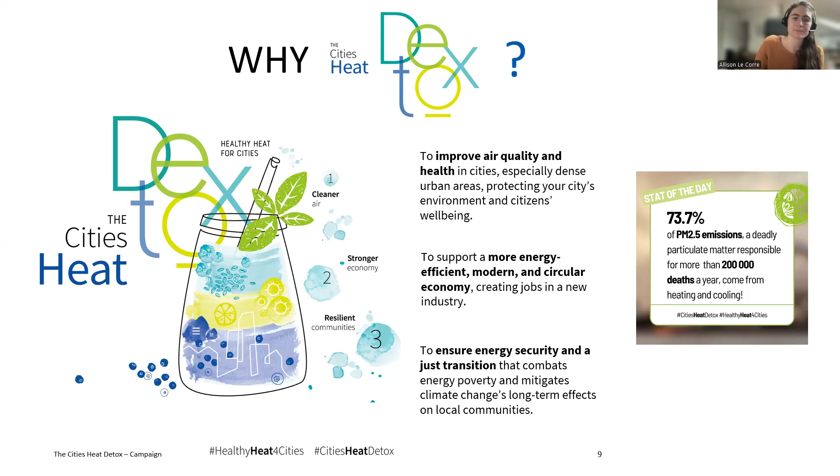What concretely can cities do to detox their heat? The campaign is also promoting the different steps in a city's heat detox, as one would if they're doing a personal detox. First and foremost, it's important to know what you are putting in your body and what are these toxic sources. The same way cities, it's important for them to know and map out their heating systems, what the sources are.

And the possible alternatives, and where they can have a bigger impact and an impactful detox journey. So here we are promoting all the efforts that cities are doing in planning for their heat decarbonization journey, in line with the obligation of the EED to have heating and cooling plans for cities over 45,000 inhabitants. So here we're sharing different stories of cities that have already done this work, with very elaborate heat maps where they show where they will be expanding district heating, where citizens can connect to district heating.

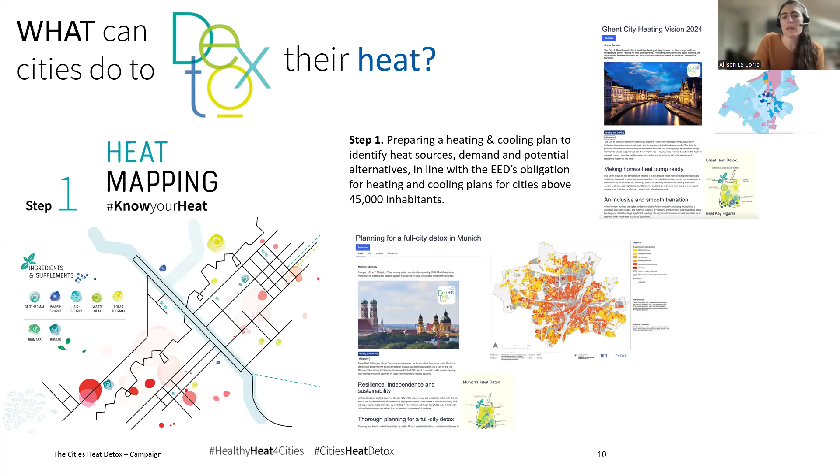Or what other possibilities they have for healthier heat, and where they also plan out their journey. The second step to the detox is then trying to go for a full city detox. So as one would try to maybe go for a full body detox, a full body cleanse, here the idea is that cities, by expanding, developing, or renovating district heating networks, can have the most impact in undergoing and really getting rid of these toxic sources.

So here we're also shedding light on different examples of cities that are either starting off with the district approach, such as Leuven, or expanding the district heating networks they have, and those also that are refurbishing and renovating and making them more modern. And thirdly, and not least importantly, once you have these networks and are going for your full city approach, when you know the alternatives, it's really finding these clean sources of heat to feed your district heating systems. So that's the cleansing part of the detox.

And here, the campaign is also trying to showcase this idea of detox, the different mixes that cities have that are very particular and unique to each city's capabilities and their territories and what they have at hand.

So here you'll see a few examples of cities' detox. What is the base they use? District heating, district cooling, heat pumps, and what are the clean sources they use to feed that heating? Geothermal, waste heat, solar thermal, or large-scale heat pumps.

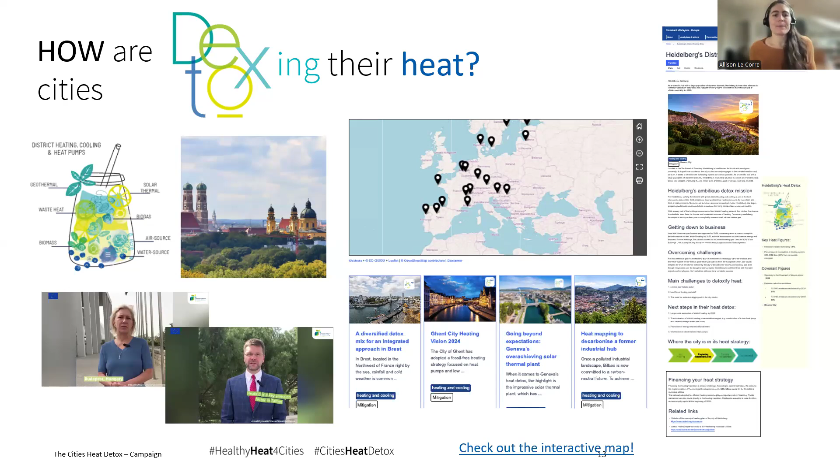So our campaign, as I said, is about sharing stories, and for that, I just call on you to share your story if you have one that you would like to see on the map.

And if you don't want to apply to the award, or if it's too late, you can also submit your story via template. That's all available in this comms package for cities that we have on our website.

And another way of participating in the campaign is also echoing the messages that I presented. And here we have a comms package on our website for partners or for anyone who wants to raise awareness around the benefits of decarbonizing heat, the importance of district heating in this effort.

And you can also subscribe to the campaign to receive regular updates, because as Oksana said, we are sharing all the opportunities that we have identified through all our campaign partners for capacity building and for empowering cities in this journey, including the crash course that will take place in June and other webinars leading up to it.

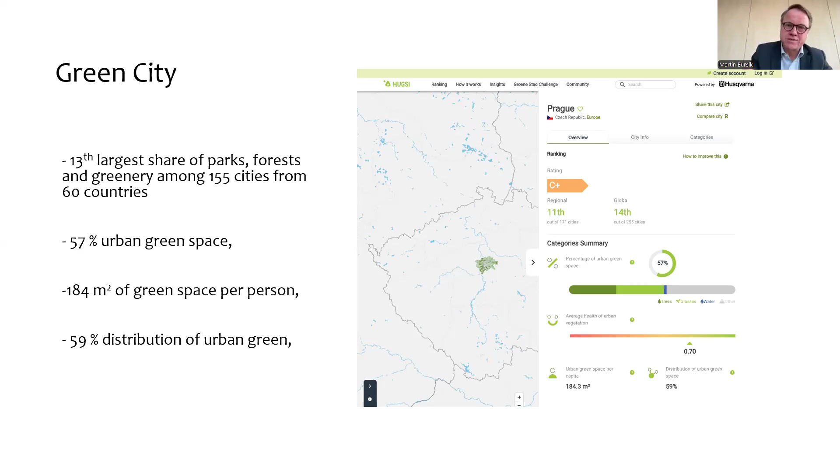We were surprised when we realized that Prague belongs to, according to the Husqvarna index, which is quite funny, the producer of these grass cutters and that technologies, they set up the index, which is a more smart way of identifying the level of how the city is green, so that the green areas are affordable, are not just in the surroundings, but are also in the center of the city. So this is where we are. This is what you can be looking for in June next year.

We developed the Prague Climate Plan, which, as it was said, has got a target of reducing the greenhouse gas emission, the CO2 equivalent emissions, by 45% till 2030. We followed the IPCC special report, which was published after the Paris agreement, the successful Paris agreement.

What is interesting, when the Prague Climate Plan was adopted in the city assembly, there were environmental NGOs there, and a Fridays for Future representative was quite negative towards the 45% reduction, saying that the European Union has got Fit for 55 already, so the plan is not updated. However, that was a kind of misunderstanding, because our reduction of 45% is compared to 2010, and the 55% reduction of Fit for 55 is compared to 1990.

As you see, the Central and Eastern European countries, which got rid of the communist regime and transformed into a liberal economic model in the early 90s, in our case in November 1989, had a serious reduction of emissions in that first period. So in fact, this is showing that 45% compared to 2010 is more than 55% compared to 1990. You see the 74 million tons to meet by 2030, compared to 90 million tons. So to stress it, Prague is more ambitious than the Fit for 55 target, in fact.

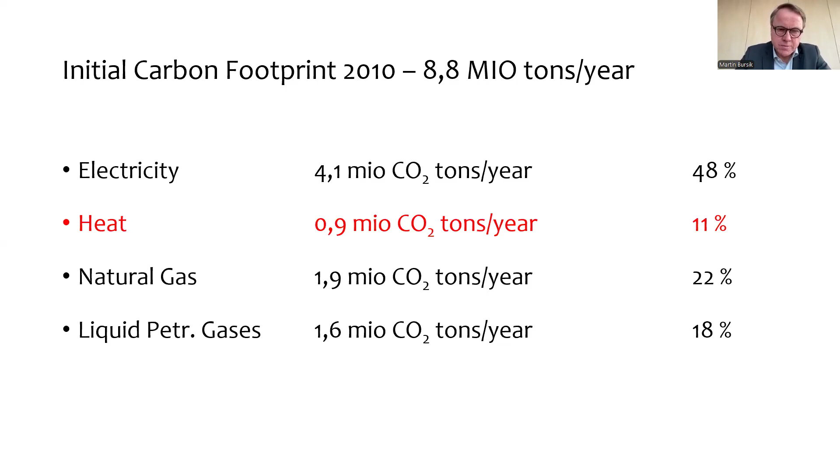And of course, cities like Prague and other cities are always dependent on the input of energy from the outside. So this is our starting point. What to do?

The carbon heat, coal heat, is delivered to Prague from a power plant, heat plant, which is 34 kilometers out of Prague. It was built in 1960, then modernized. It's been delivering heat to Prague since 1995, and the carbon intensity of the heat is the highest possible, running on lignite. It is in the ownership of Czech Energy Works.

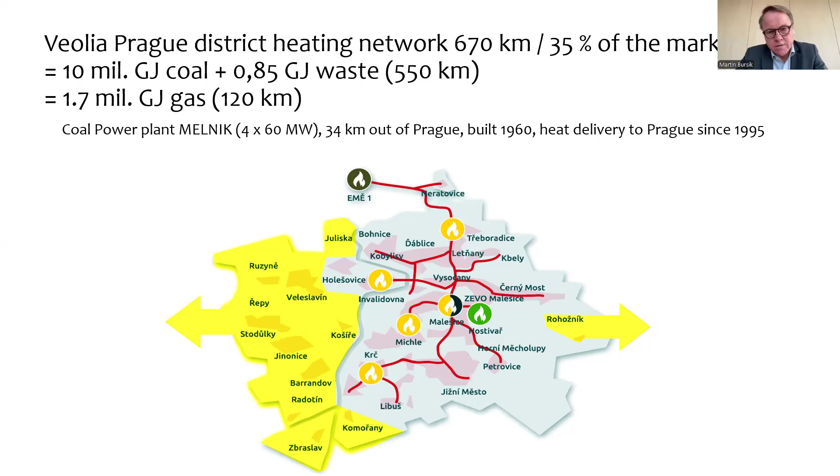The problem of the city is a very sensitive issue: on one side of a pipe you have a heating plant owned by the dominant Czech Energy Works, a partly state-owned company, and on the other end is Veolia, which also has no connection with the city. So though the utility is called Prague Heat Utility, Prague doesn't have any influence on it. There is a contract between these two companies which is even unknown to us. The only thing we know is that it's going to last until 2034, and that there is a plan to switch the Mělník power plant from coal to gas. So this is where we are.

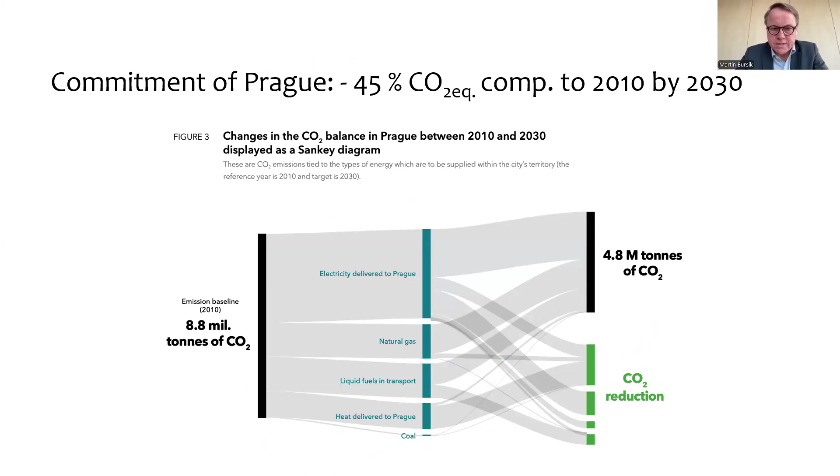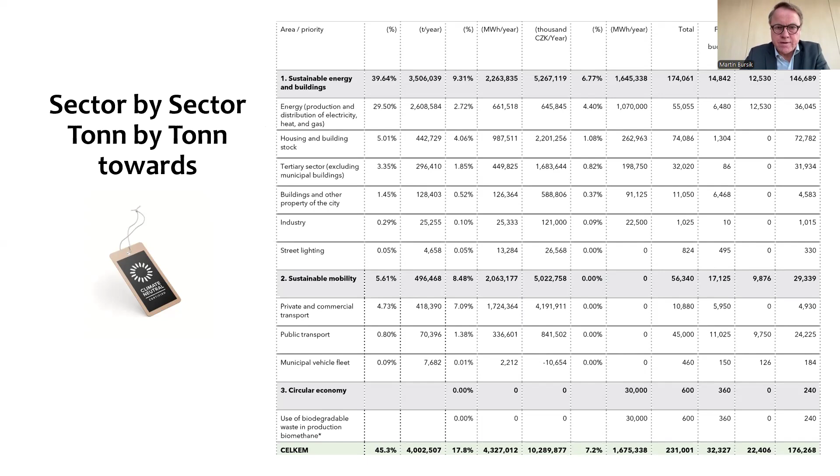So we were thinking hard about how to achieve this 45% reduction. You see the Sankey diagram, which shows what we can do in electricity, natural gas, liquid fuels and heat. This is where we got, and here you see the potential. The highest potential, of course, is in energy and in the housing and building stock. We made a number of Excel sheet calculations to test whether we could really reach this 45%, and we got it. As you can see, almost 40% of the potential is in sustainable energy and buildings, with a dominant part being heat and electricity.

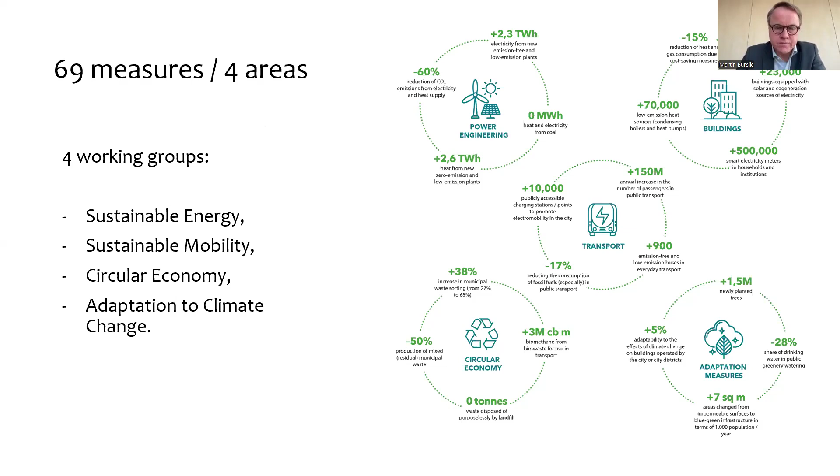So just to mention some of them: we founded the Prague Renewable Energy community, and we are already sharing surpluses of renewable electricity from one side to another, and others. And then, because we have very limited options to influence the dominant source of central heating, we started project preparation.

of a new energy center, as we call it, which is going to be built at the location of the central wastewater treatment plant, which treats 93% of all wastewater of the city, out of 1.4 million residents, and we expect the population of Prague to rise. So this wastewater treatment plant will be modernized and the capacity will increase.

There's wastewater, and you can see on the map that it's on an island on the Vltava River, so it's a fantastic location for a wastewater treatment facility. The water leaving the wastewater cleaning process has a temperature 10 degrees centigrade higher on average than the temperature of the Vltava River. So there is big potential, and the flow of water is 3 cubic meters per second.

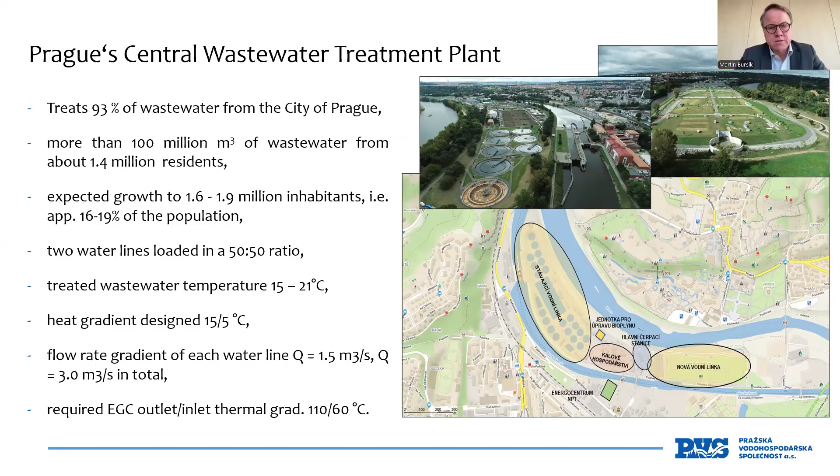So we started working on a project to build industrial heat pumps at this location. The potential is 180 megawatts with water at a temperature of 90 degrees centigrade. Just to compare it with the existing coal-run source, this could cover one third of the energy delivered so far by coal. So this is not negligible.

We visited, with a team of experts and also politicians, Helsinki and Stockholm, to see where these industrial heat pumps have already been in operation for dozens of years, and then also Vienna. The picture down on the right is just a picture of the installation of an industrial heat pump in Vienna. The first phase of the project has already started.

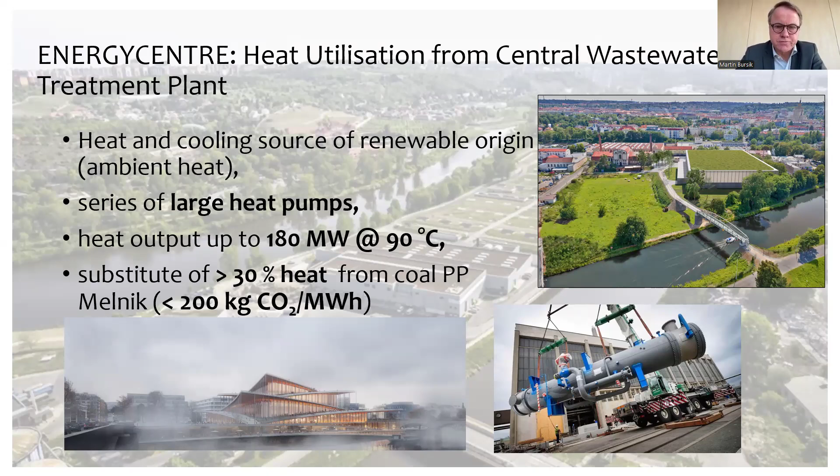The picture on the left below is just an imagination - it doesn't exist yet. It's a new building of the Czech Philharmonic, which will also be on a bank of the Vltava River. On the upper right side you see the visualization of this energy center, covered with grass, next to the wastewater treatment plant.

The issue is how to get this clean, renewable heat into the grid, and this is a big question, because according to the Renewable Energy Directive, the operator of a central heating system has an obligation to feed in and connect heat produced either from renewable energy, ambient heat, or waste heat. However, in reality, this directive was transposed into Czech legislation only with respect to the first part - that means renewable heat, but not the heat produced from waste.

Czech Republic is one of the 10 countries of EU27 which, according to European legislation, has got a so-called modernization fund - a very robust economic vehicle where 4% of the turnout of EU ETS in Europe is shared among these 10 countries. This is a very robust vehicle for decarbonizing and innovations in the country. However, the sub-program heat...

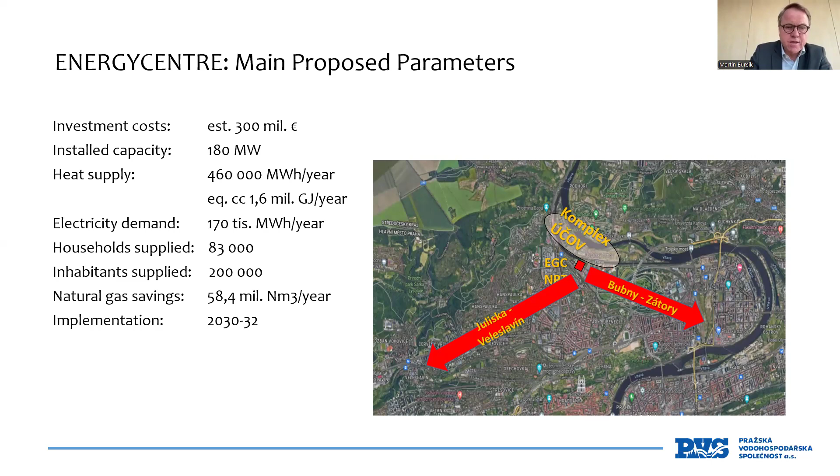And then we have a calculation of natural gas savings and the year of implementation. Another project, which is already in operation, is a pilot project of producing biomethane from sludge, but not just biomethane - we are also cleaning it to bio-CNG. There is production of 1 million cubic meters per year. It's just a pilot. What is interesting is that you see the red line on the map down there.

This is how we connected the biomethane station to the grid, so the bio-CNG is pumped to the grid. Then the issue was that biomethane has a lower energy content, so according to Czech legislation, there was a necessity to so-called propanize it - mix it with propane so it has the same energy content as fossil natural gas, which is a crazy idea. You have clean biomethane from a renewable source of energy, and then you mix it with propane, which is a fossil gas. So we did it the other way around.

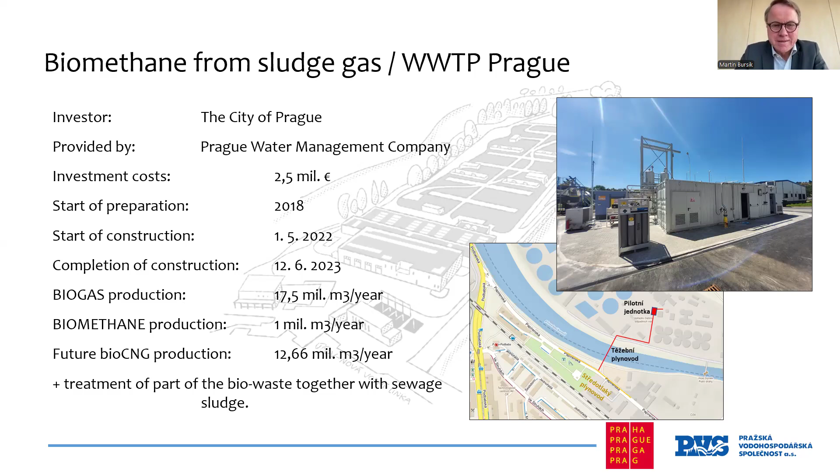We made a mathematical model showing the hydraulics, which calculates the content of energy in every cubic meter delivered to a certain place. This is how we avoided mixing renewable biomethane with fossil propane.

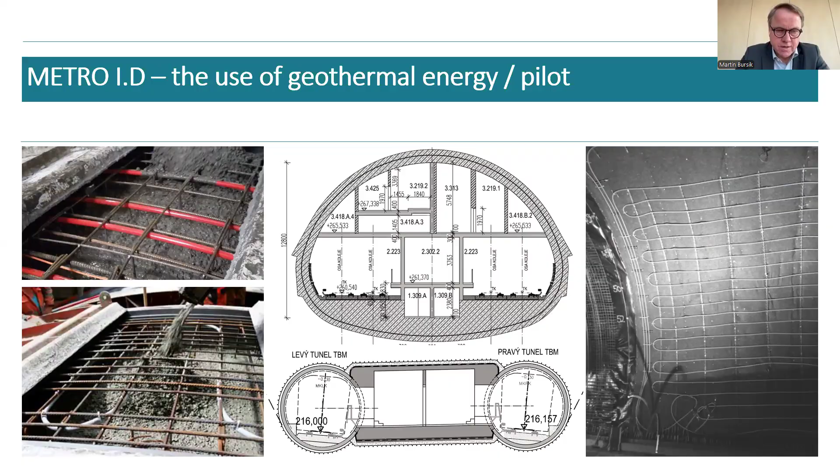The third, last but not least, project under preparation is the use of geothermal energy out of the underground line. Prague has started to build the new metro line I.D, and the idea is to use geothermal energy out of the underground. There are two ways the tunnels and stations are being built.

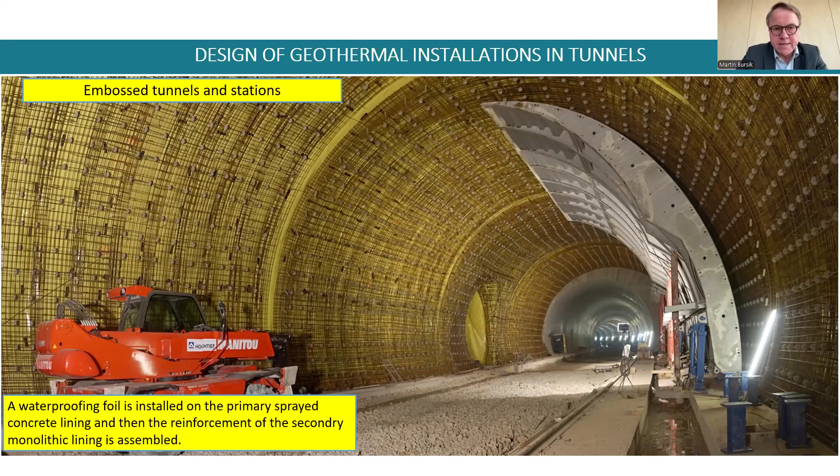Either they are embossed or done from the surface, and these examples show that there are two linings, one next to another, with an internal secondary monolithic lining that can be assembled with the energy mat, where we collect the energy and use it through geothermal heat pumps for surface heating and cooling. This shows how the absorber pipe is connected to the lining.

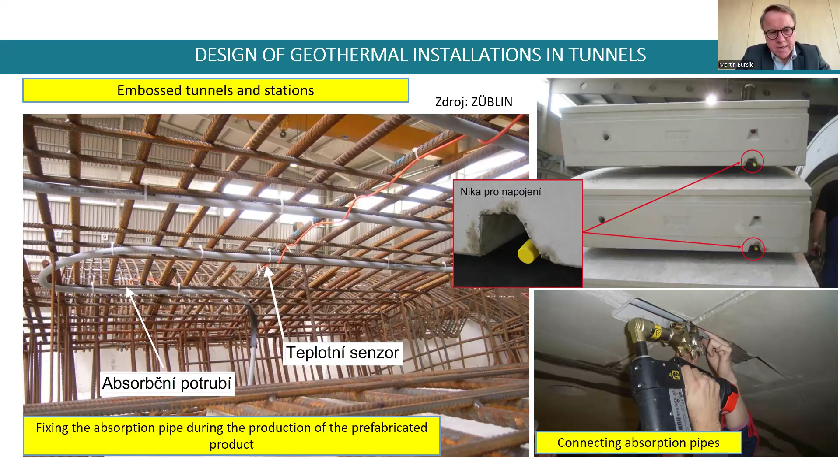We also have examples from underground in Vienna, and an example from an underground station in London. We cooperate with experts on tunnel building who also got experience from Austria.

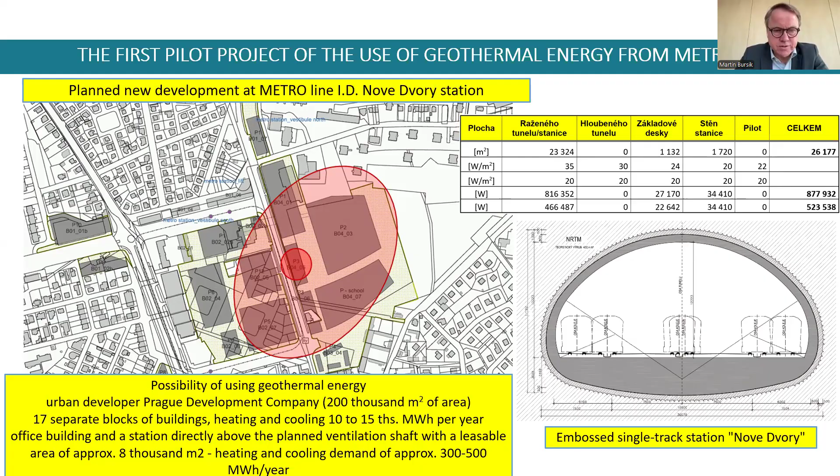The development plan being developed by the city of Prague shows the need of energy which is much, much higher than what we develop here. But we just want to show that this could be a natural part of any projections where whatever constructions are being projected under the ground.

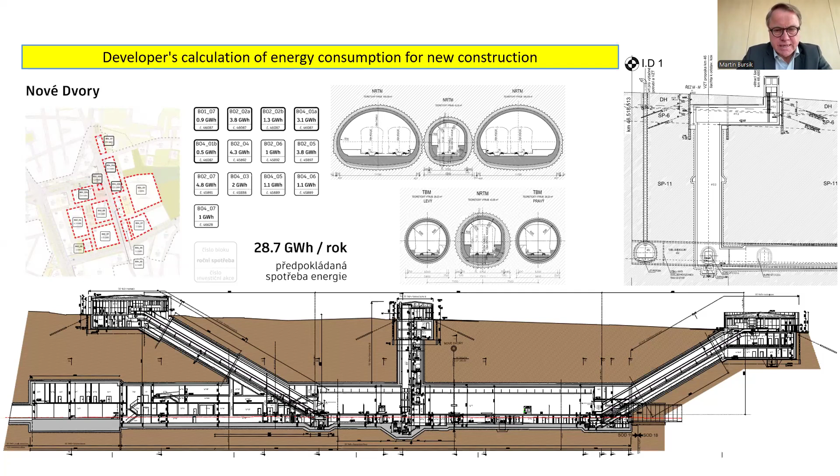So then, of course, there is the potential of geothermal heat to use it and to substitute fossil fuels, and to offer the citizens clean, detoxed heat. Thanks very much for your attention. Of course, I'm prepared to answer your questions if I am able.